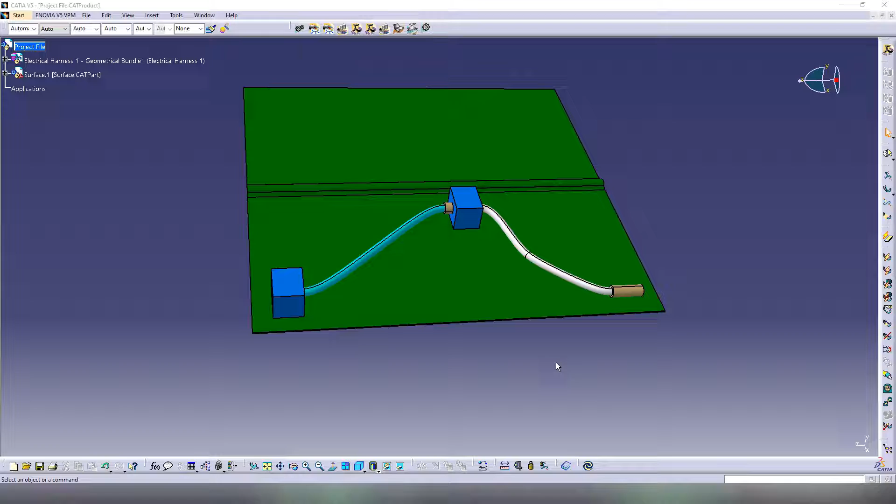Here we have the project that we saved last time in part 2 of the video, so there is nothing to download from any of those videos. We started from part 1 and created all of those solids, so this way it's easier for everyone and also for me. I don't have to provide files to download, and many times links stop working in the future.

So in this way everybody creates its own files, so you will always have them. And in this video we are going to do a few operations just with the wire bundles, so we are going to modify them. I'm going to add a new one around here just to see how the commands for the wire bundles work.

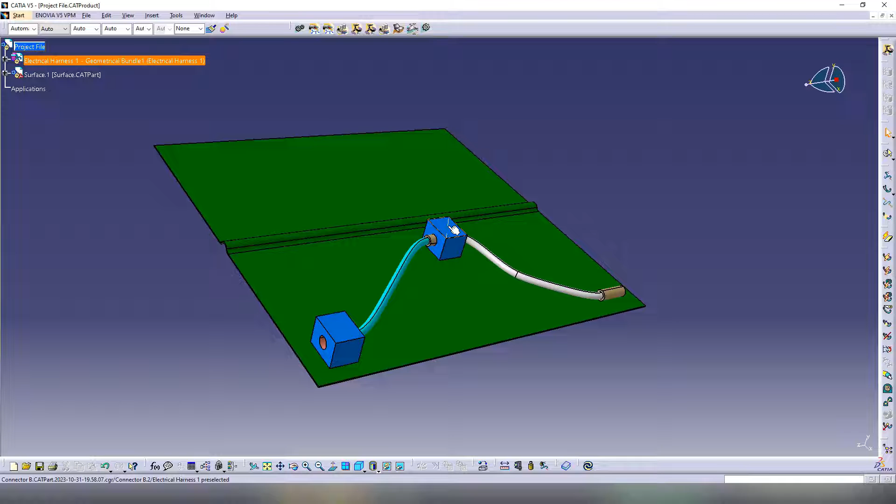And now let's continue with this project here. So in the last video, we did those wires. If you double click multiple times, you're going to get this window. So we are basically activating the file of the wire, which is this one here. So this is a CATPart file. If we click here route definition, here we can see the points that we use to route this cable. So we have from this connector to this connector, those connectors are electrified.

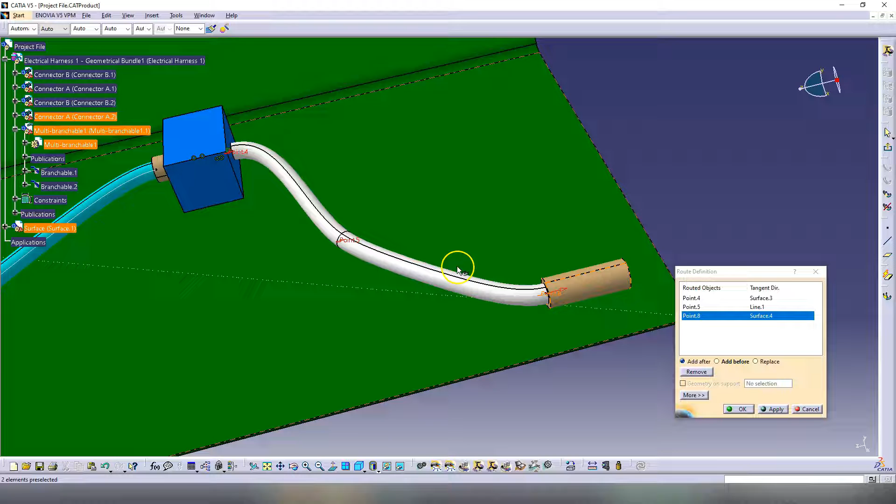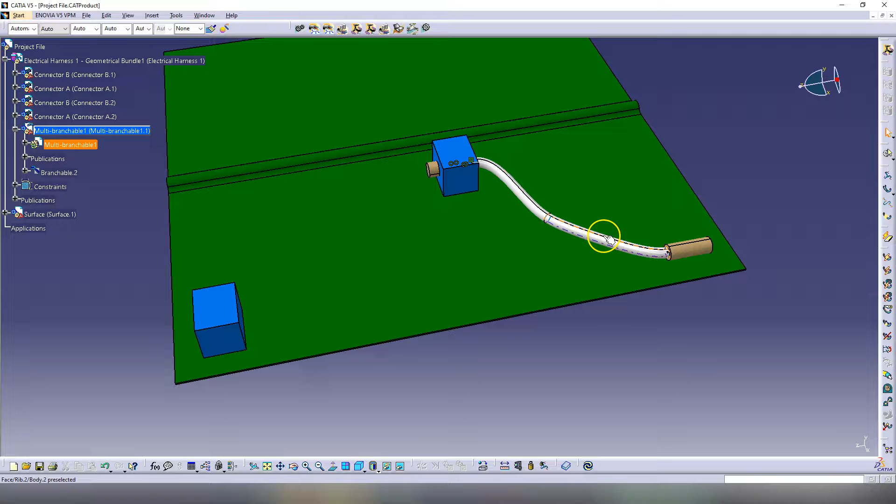And the first thing I would like to show here is how to delete one of those bundles. So if we stay inside this file here, if we activate this file, the multi-branchable file, here on the toolbar we have a command called delete special. So if I click on this and then I click on the branch, we have here delete and delete special. If we press delete special, click OK, then the software is going to delete the branch together with all the links that the branch has.

So you should not go here, right click and delete it from here, because if you do that, it's not going to also delete the publications and links. So you're going to end up with a project file with a lot of errors and a lot of issues.

And also in any company, if you go to a Catia V5 interview, one of the things that the CAD manager is going to want to see if you know how to delete stuff, because he wants to be sure that you're not going to start to fill projects with errors. And again, I teach a lot of those things that you have to do at the interviews in my course. I truly believe it's impossible to not pass a CAD interview with my courses. So I 100% believe it's impossible if you learn everything I teach.

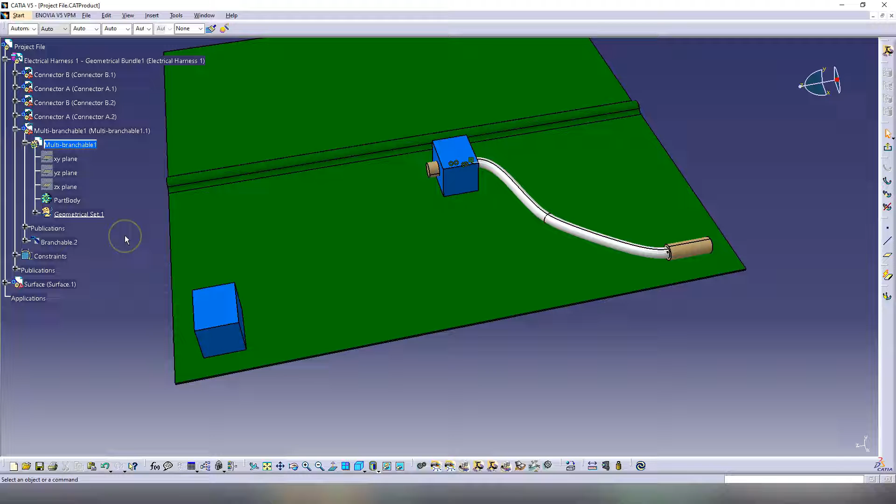So this is specifically for electrical harness design. So now let's make this bundle here again. So I like to activate the multi-branchable CATPart. So from here, this is the command branch definition that we add a new branch, and you want to see that appearing here. Let's keep the same 20 millimeters, bend radius ratio it's 2, route definition.

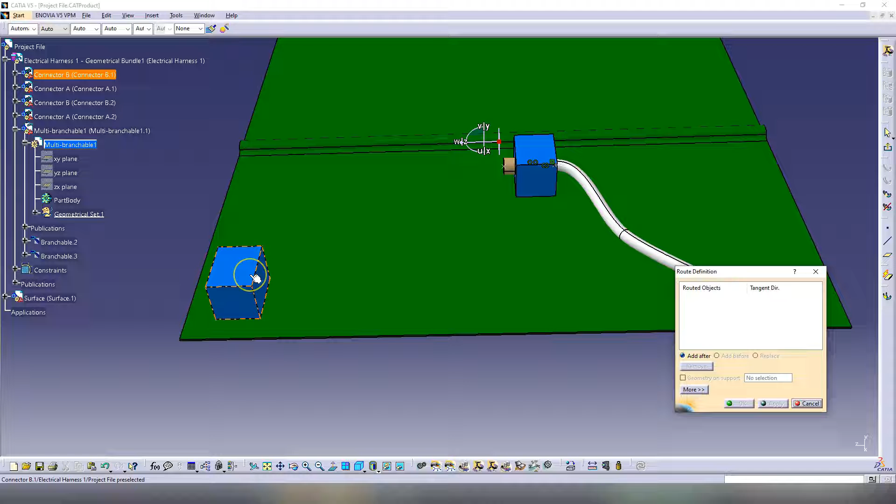So we click on the first electrified connector. We did this in the first video. And then on the second connector here. And in this case, we have a bundle. So now let's say that after we created this bundle, we want to add an intermediate point around here somewhere to make the bundle go from here through this point and then arrive at this connector, or even the other way around.

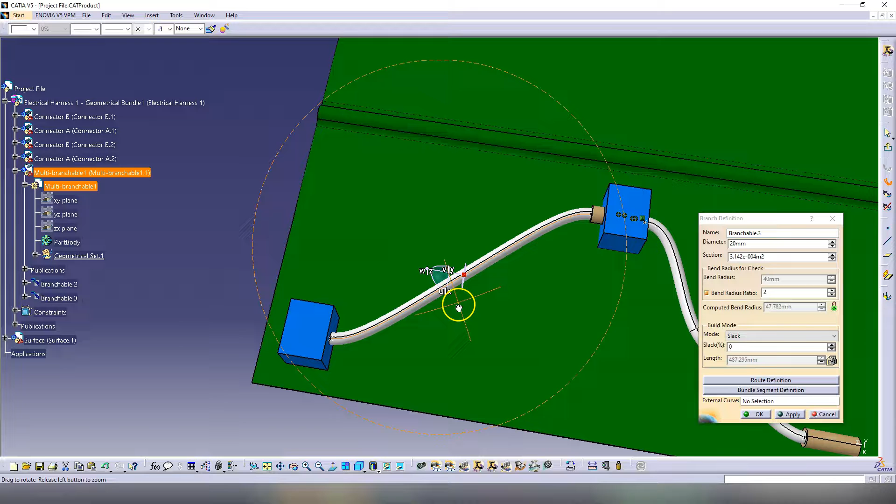So let's add that point here. First, I'm going to open the branch. Here we go to route definition, where we have the points. So I want to look here. This is the first point, so point 9.

If I click on it, it's going to show me the direction, the tangency, and I need to add after, so I'm going to add a point after this one. To add something, you need to already have the retainer or whatever is going to hold this cable in reality, you need to have this one here to click on it.

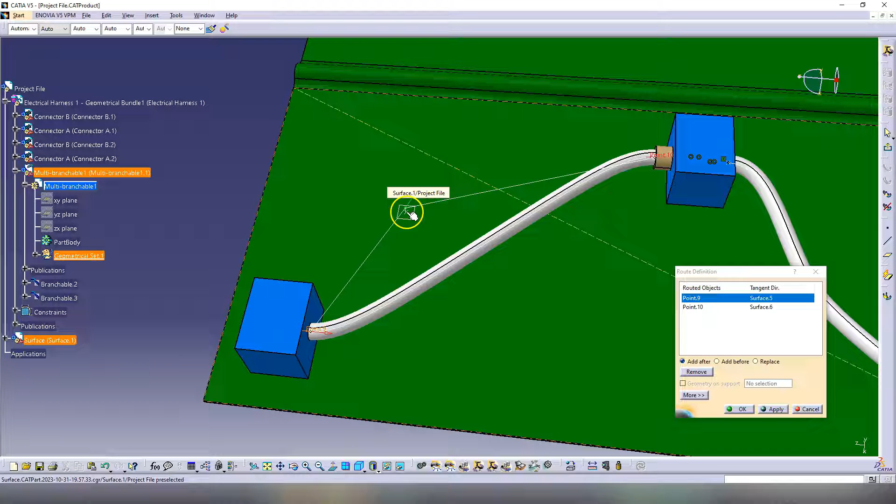But if you don't, let's say you are only making a study. In this case, as I showed in the previous video, we hold down the control key and we can add points on every kind of surface we want. So I'm going to add a point here, and now we have point 12. It's showing the direction. Have it selected here, add after. So I'm going to add another one here.

Now the cable is a little red. This is because the computed bend radius is not respected, it needs to be 40, but it's 39.9 because of the curves the cable is making. If you get that in a project, that can mean the cable is not going to work in reality. But the software is also doing this because of the random tangencies that were added to the points.

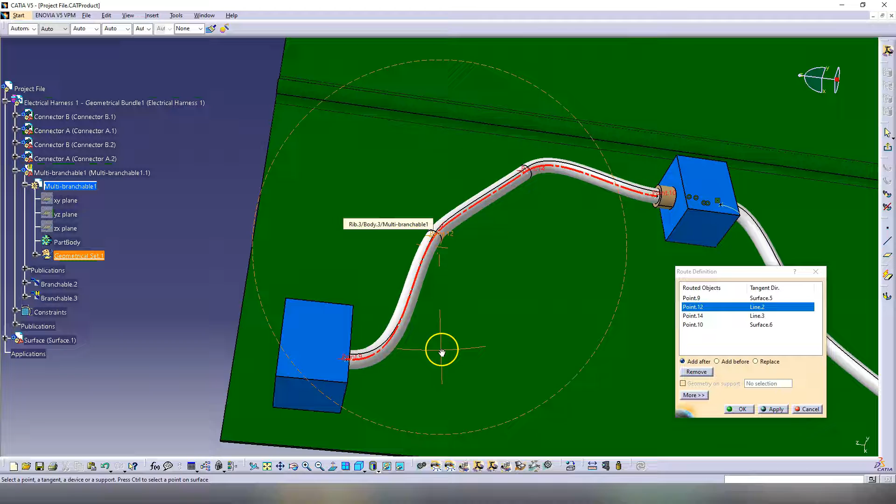So if I go here to the first point that we added, point 12, we can see there is a tangency, this arrow, which is calculated by the software. So I can remove this, if I go here to more, I can remove tangent.

Then I go to point 14, which is here. So I can also remove tangent from this point, and you'll see them disappearing from where it says tangent direction. So now the cable is just going through that point, but it does not have a direction, it does not have a tangency. Now it's 39.99.

So this is kind of a bug that the software does. If you don't have enough slack in the cable, it's going to give you this. This is almost 40, so it should be okay. And to fix this, we need to add slack here.

So there are two types of slack in Catia V5. There is slack that we add here directly on the bundle, which is added to the entire branch from start to finish. We have percentage here, so I can add 1% slack. If I click apply, 1% is going to be added to the entire cable. Now it's not red anymore because that slack will make the branch have smoother curves.

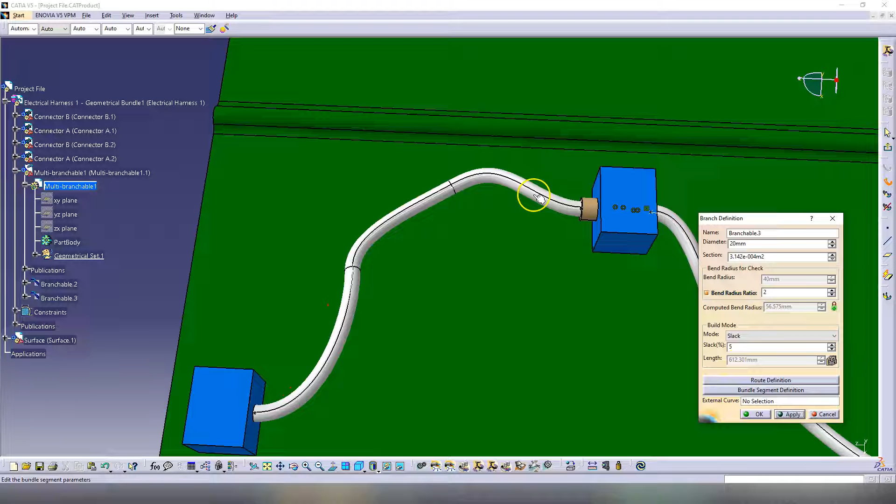So I can add 5%. This means the length of the cable is going to increase. Here we have the length, the current length is 588.9 millimeters. Every percentage of slack that I add, so this is 5%, I'm adding 5% from this value. So if it's 588, 5% is going to be around 29 millimeters, so it's going to increase by around 29 millimeters. And you can also see the cable changing its shape.

Another type of slack here is to add directly the length that you want for the cable. So if you click on this one, you change the length, and it's going to show you after that what that means in a percentage of slack.

Another one is bend. So bend, I explain this more in the course, I give more examples. This needs some more examples. When you have a bundle that you know is going to bend in reality, you select this here because you want to avoid all the errors that Catia can give you.

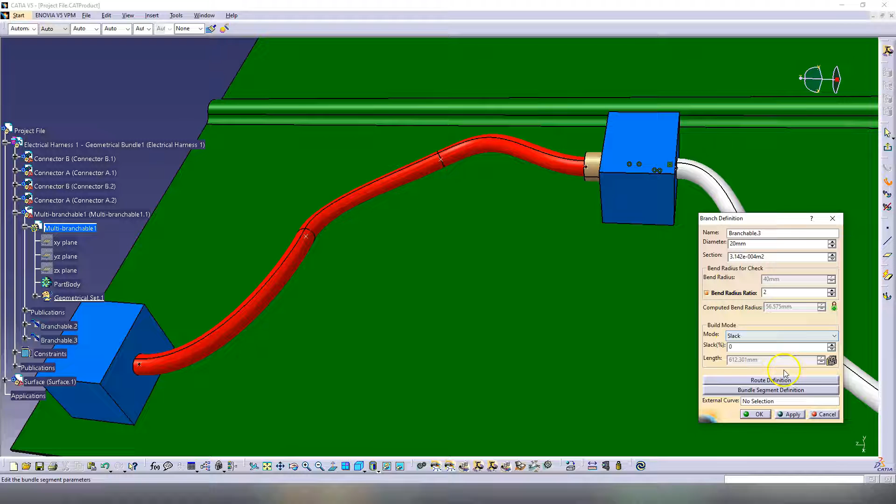So let's keep for now the slack in percentages. Let's add here 5% slack, click OK. Now the cable has a little more slack.

One issue here is when you don't have tangencies, the cable can take any direction, and as you can see here it's clashing with the surface. So to avoid this you need to add directions inside the cable, tangencies.

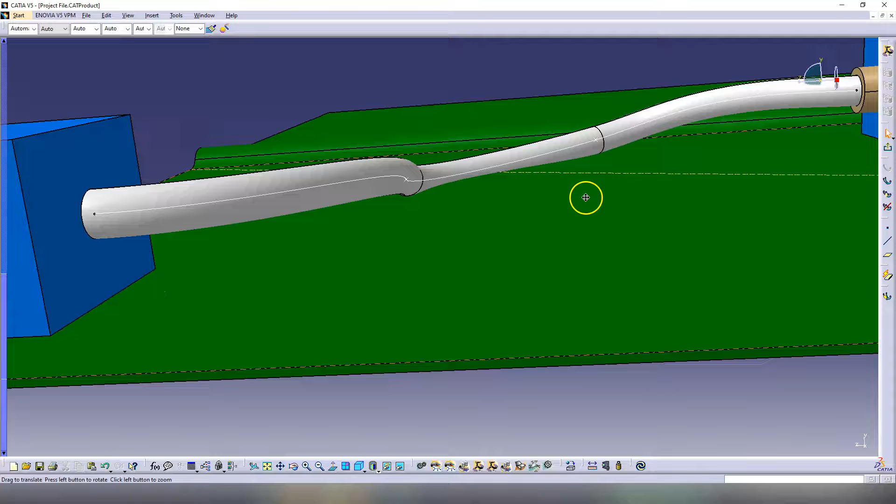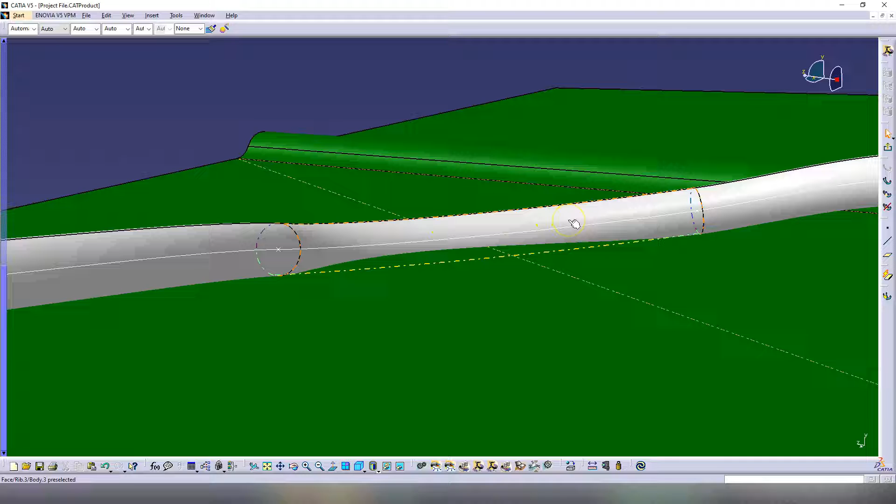In automotive you need to be careful with that because you don't want the cable clashing with the body in white, because after that whoever projects the carpet or whatever is going on top of the cable, it's not going to take the clash into consideration, so he can just build something over it exactly as you see it here, and then in reality your cable is not going to fit because he used the cable exactly as it is to design whatever he's designing. Normally in a professional environment he's probably going to contact you and tell you this does not look right, but you are the one that is responsible, not anybody else.

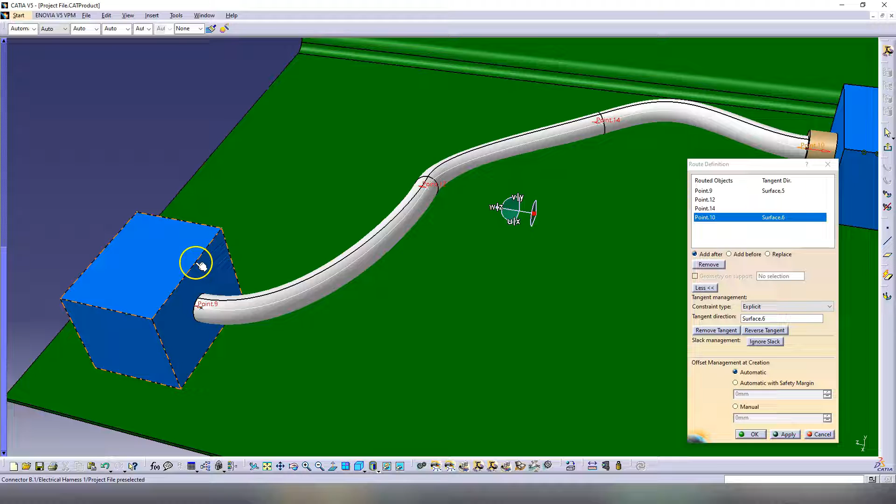So let's try to fix this. I'm going to add some tangencies that we have around here. For this point I'm going to add the x-axis as a tangency, so I can use every line that I have here to add the tangency. For example, I can use this line on this connector, but I cannot click on it because it's electrified, so it's seeing it as an electrified connector. But I can use this line here from the surface. Now you see this point 12.

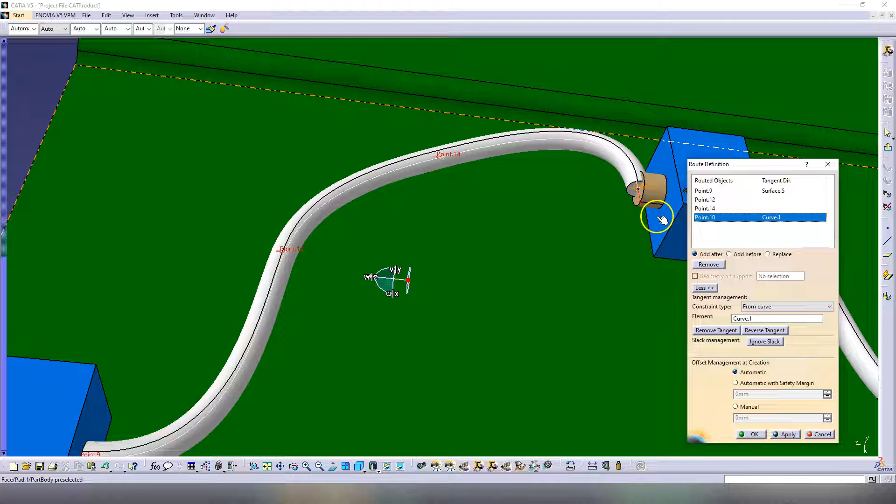You can see the error that I did here. When you add the tangency, you want to make sure that the point is selected when you click, otherwise it's going to add the tangency to whatever you have selected. By mistake I had point number 10 selected, and when I clicked it changed its tangency. I'm using this as a lesson because you will make a lot of those mistakes, and they cost you time - you have to fix everything back. So in order to fix this, I click on point 10, I do replace, and I click on the connector again. Now it's getting fixed here.

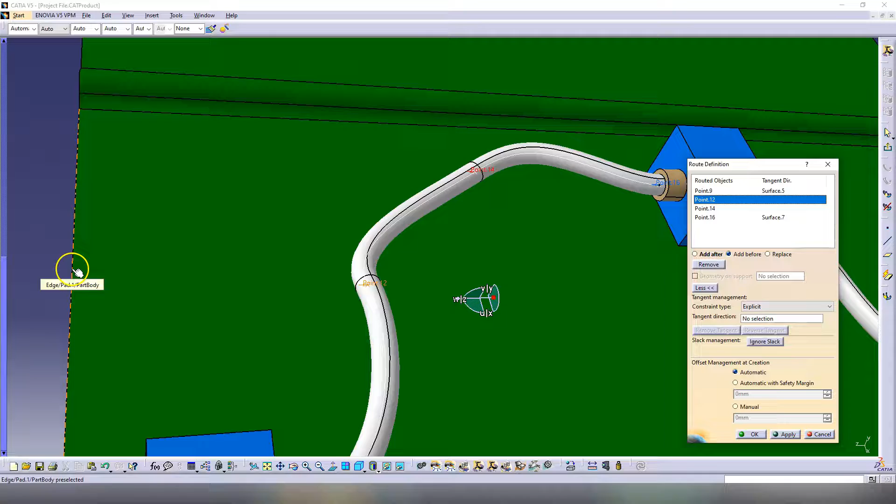Then let's go to point 12. I'm going to click on the line again, and you can see that we have the tangency, but it's added in the opposite direction - that's why it's messed up here. So I'm just going to click. I can see the arrow here, but it's red like the cable, so sometimes you won't be able to see it. Those are the colors that Catia uses, but you also have the option here - reverse tangent. I'm going to click on this, and now you see it's correct.

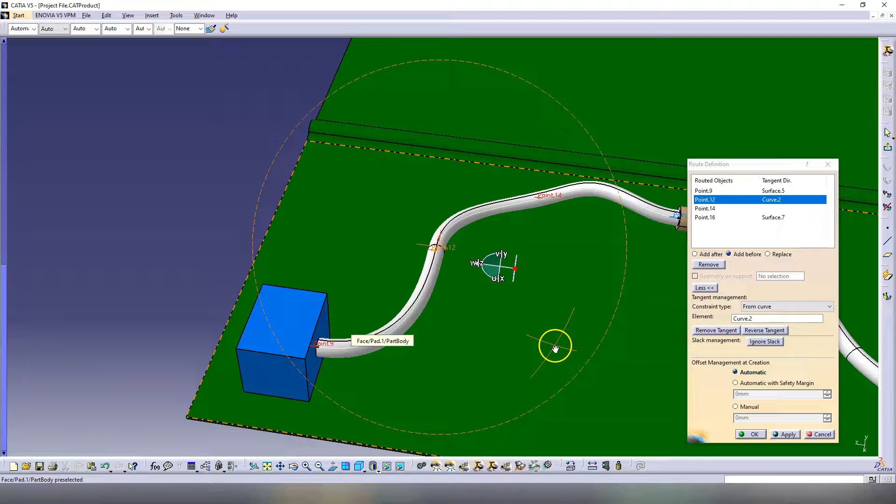For point 14, I'm going to use this other direction - this line here, or an axis. Again it's reversed, so I click on the point, reverse tangent. Now let's click OK. And we can see the computed bend radius is 35.

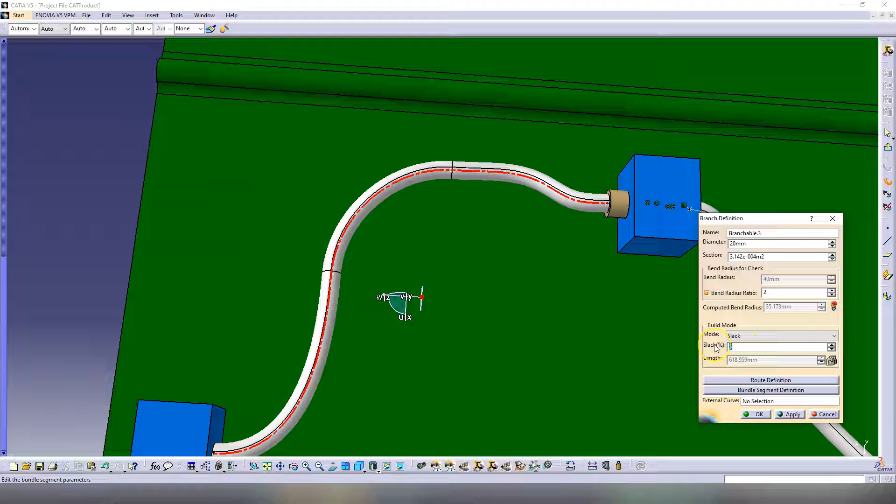And that is happening because we have too much slack. So let's reset the slack, let's go back to 0 with the slack. Click apply - this is how the cable looks naturally without any slack. You can add 1%, 2%, up to the maximum, and you see it starts to look better and better, smoother and smoother. But this is one type of slack, so let's take this back to 0. Click OK. This is adding the slack everywhere on the bundle.

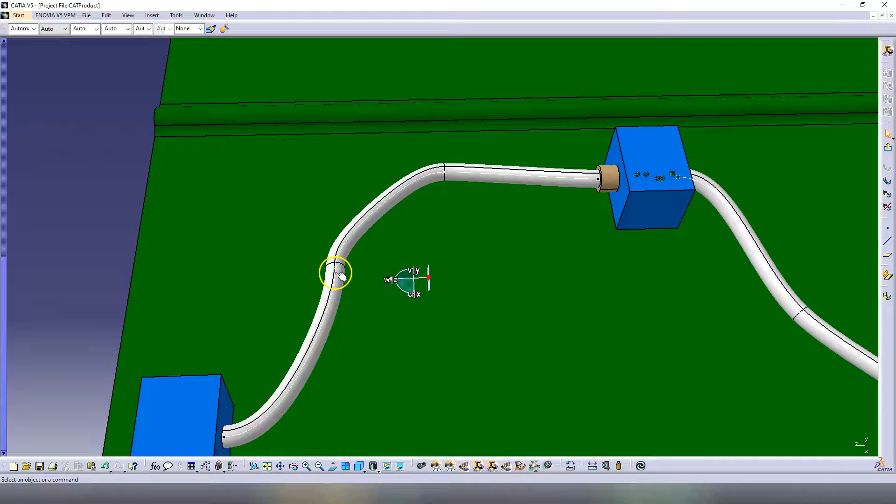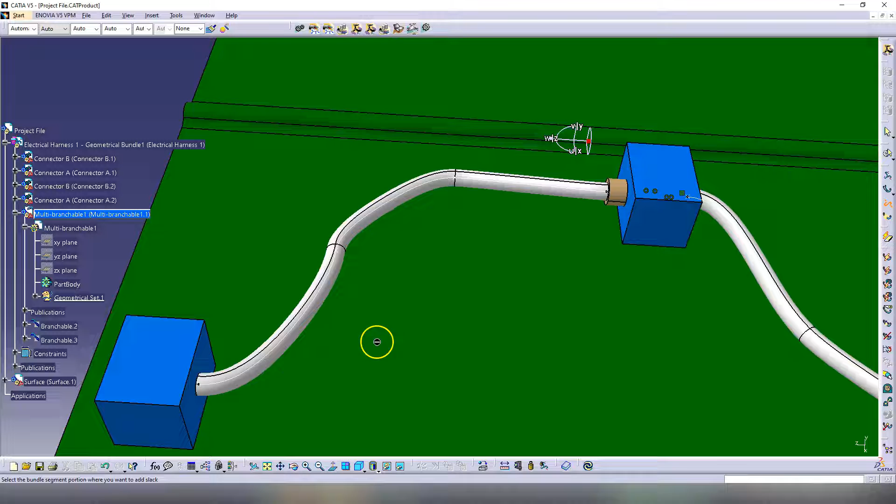But what if I want to add slack in between the points? I want to add a value of slack here, one here, and one here, because this cable has 3 segments. For that we use local slack, which is in the electrical harness assembly workbench. You can switch the workbench, or if you activate a product, the software should automatically switch to that workbench. Here is the command, add local slack. If I click on this, I need to click on the segment where slack is going to be added - let's say from here to here.

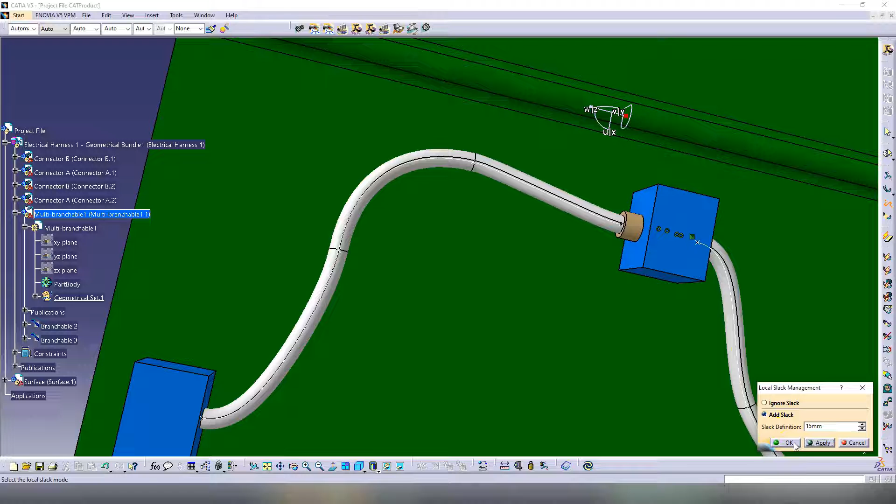Here we have add slack - this is in millimeters, not percentages. Let's add 5 extra millimeters of length in this cable. Slack is basically extra length. Click OK - you see it's getting better. Maybe I can add 15. Now you see it has about a 90 degree bend - this is probably what you want. Then I click again and click on this segment.

Let's add some slack here. So we need less slack here, you want to look around. Let's add 3 millimeters - so 3 millimeters here looks okay.

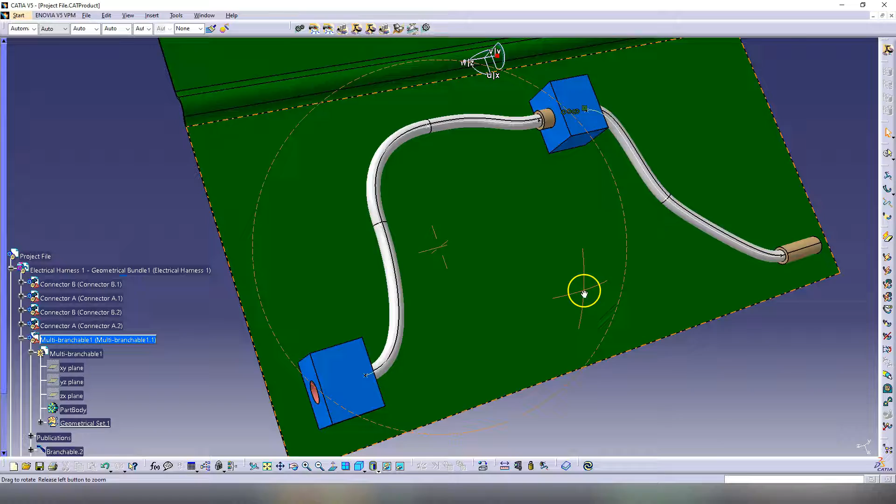Add local slack on this one. Let's add 5 millimeters here - you see, 5 millimeters looks right. So now you see the bundle, it's not clashing. This is how you adjust the cable.

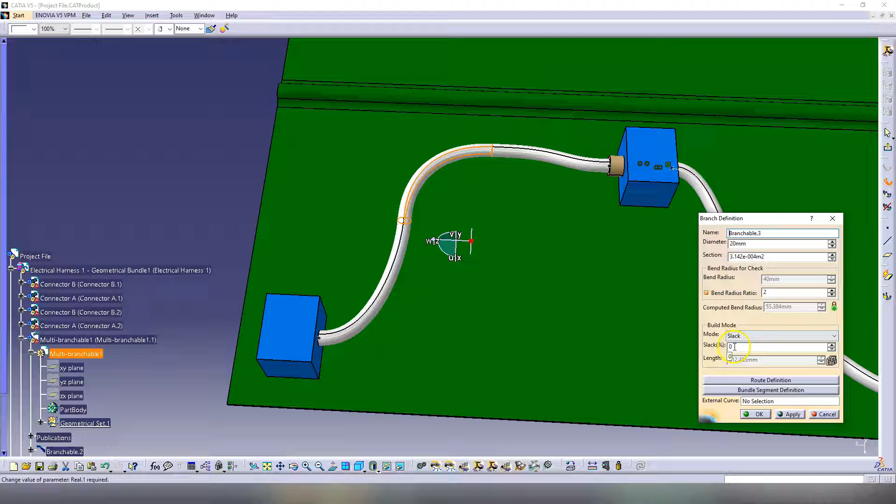You cannot see anywhere in the tree the slack that was added, but you can verify that by clicking on add local slack and clicking on a bundle, and it will show you if you have any local slack on it. So you want to be careful with that. It will also show on the total length here, but it's not going to show here, so be careful not to add slack here and local slack at the same time.

Click OK. So if you want to add a point on a bundle, but you don't want that to be on a surface like we had here, but just in thin space - let's say you're doing a study for something, because this is how every project starts. Maybe you don't have all the parts, you don't have all the retainers, but you need to design a cable to occupy the space that you need.

So in a company, this is how you are going to design it. You're going to have the mechanical project, like a part of an automotive vehicle, and your boss is going to tell you: look, we need to add a cable in there so that everybody sees there is a cable in there. You won't have fixings, retainers, or even connectors - they won't be there, but you'll need to add the cable.

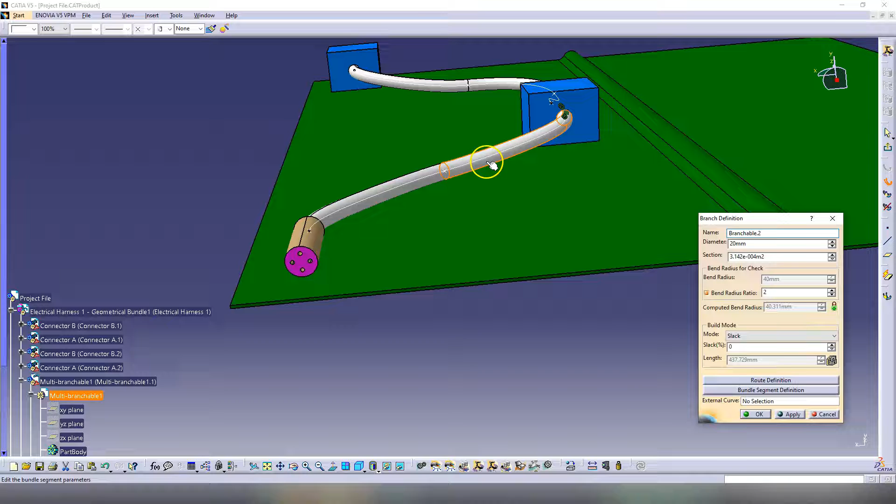So in order to do that inside this bundle - this is a part file inside the multi-branchable - we can add any type of elements from part design. In this workbench, the electrical 3D design part, let's see those here. Those are the newer workbenches. This one, electrical assembly design and electrical part design, those are the older workbenches, and those two are the old workbenches with some extra stuff inside.

If I switch to electrical part design, yes, you have here all the commands, but if I go to electrical 3D design part, let me move this toolbar here again - you're going to move the toolbar for each workbench. So here you have the same commands, but you also have this toolbar with a point, a line, and a plane. This is what they added new in the same workbench.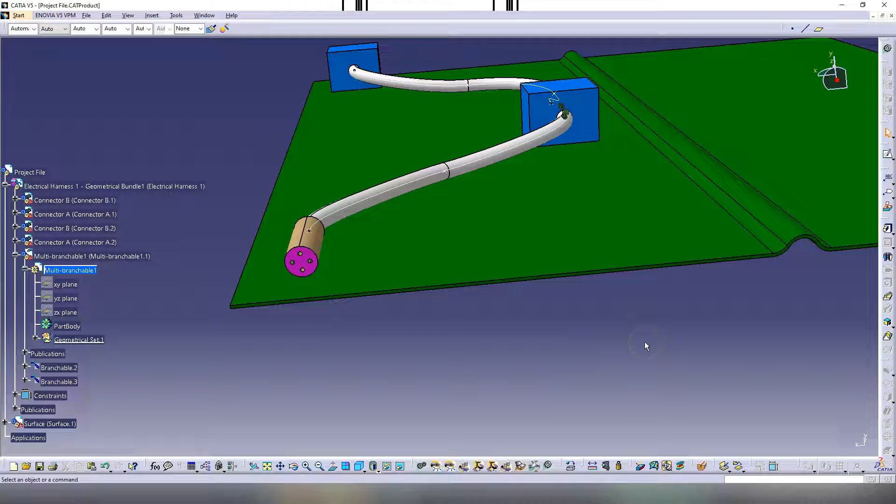If you don't find it in your CATIA V5 installation, you just need to go to part design - let's go to part design, and you need to have this part file selected. This is basic CATIA V5 knowledge. From here I need the point, the line, and the plane, and I'm going to add a point here, like a small sketch in thin air here.

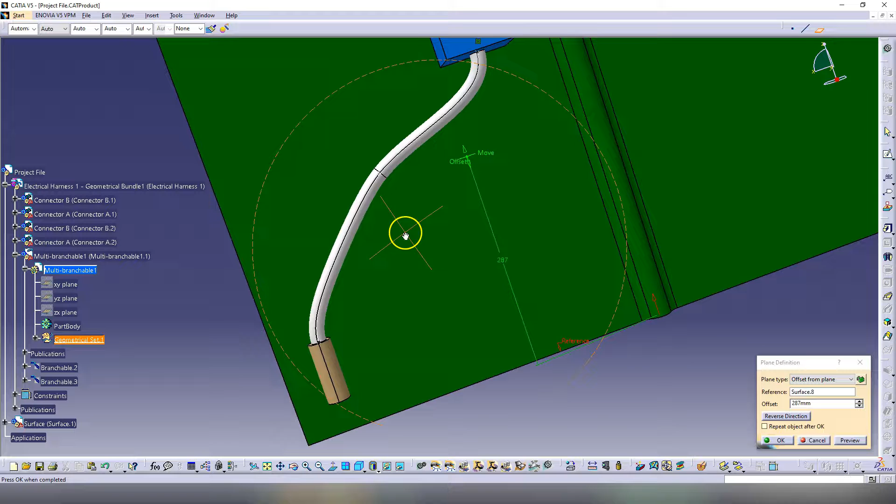For that I'm going to need the plane, and I want to add the plane on a mechanical part like a sheet metal or something like that. So I'm going to add it here, let's move it here, and the offset around here is going to be - move it a little back. Let's say right in the middle of the cable. Click OK, and let's add the sketch on this.

So here we are in sketch mode, and I'm going to add the point around here somewhere. So if I go here in sketch mode, I want to add a circle, and let's make this 20 millimeters, exactly as the cable is. You only need the point, but I like to add circles for reference.

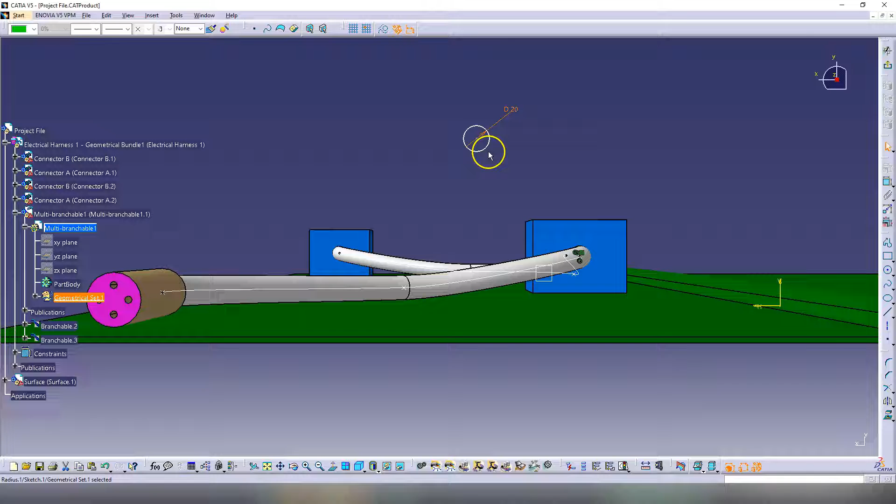So this is the cable, and I like to add the circle because I can just add the dimension between the circle and this surface here. Now I can control it with a dimension - if it's 0, the cable is going to touch the surface, but if it's 10, the cable is going to be 10 millimeters away from the surface. So let's do 20.

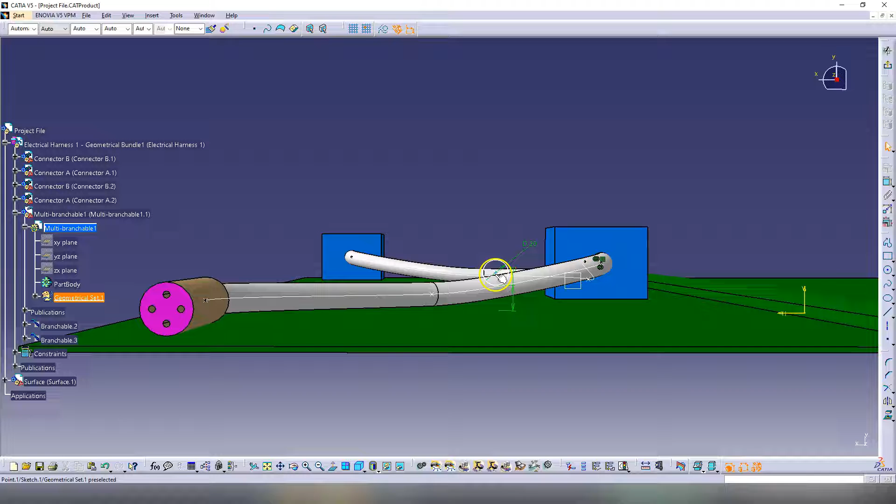And I want the point in the middle of the circle to transform it into a standard element, so I can see it outside of the sketch. I can also control this position, but I'm going to leave it like this for now. Exit the sketch. Here we have the sketch.

Open the cable route definition, and we have this point here that we don't need anymore. So I'm going to replace this one. Click replace with this point here that we just created. And you see the cable is just going through the point, but I need to add a tangency.

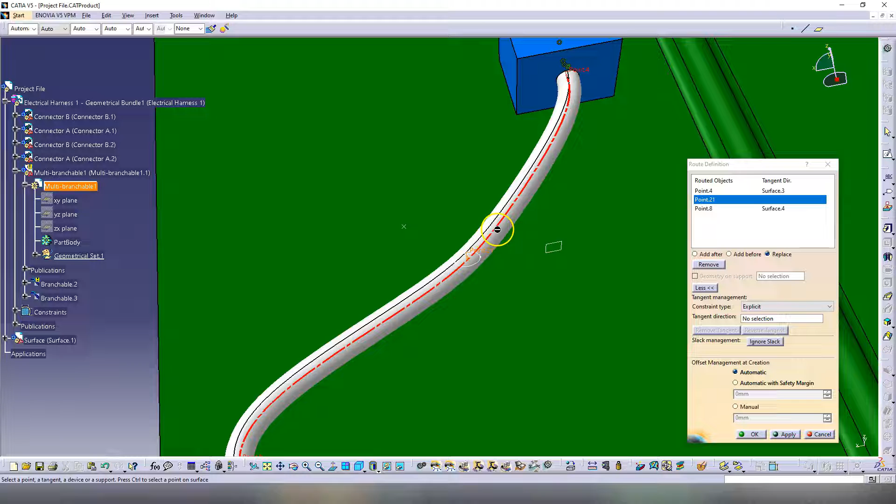So I'm going to use this plane as a tangency. It's going to be the other way around, so I'm going to do reverse tangent. Now we added a point like this.

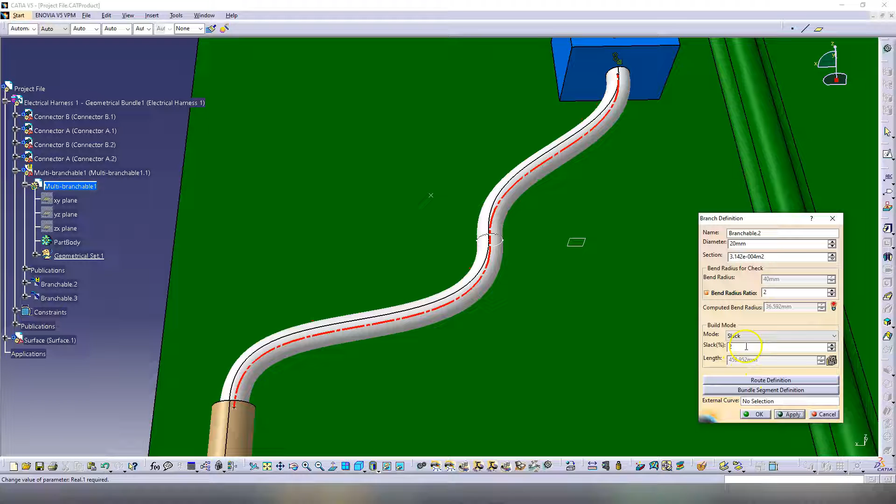Computed bend radius is 39.9, so it might be the same thing. We just need to add just a pinch of slack, just 1%. Let's see if we can fix it like this. No, so it's becoming worse.

So let's go inside the sketch and just move this to the left. Exit sketch. Let's move the plane. So you see I'm controlling all the points. So even if I'm moving the plane, you see how the cable is changing in real time.

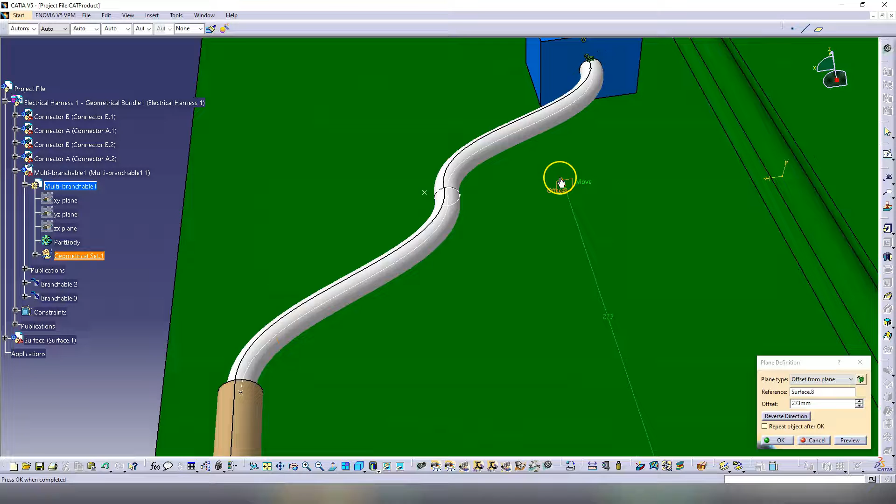So I just solved the bending radius issue. Here it's red. If I move it a little forward, now the cable is green. So by green I mean here. So now the bend radius is 43.

So we are in parameters. When you work in companies, you're going to get parameters for the cable. A lot of people ask me, how do you calculate the bending radius? Because they hear that in an interview or something. That's not the question you should ask.

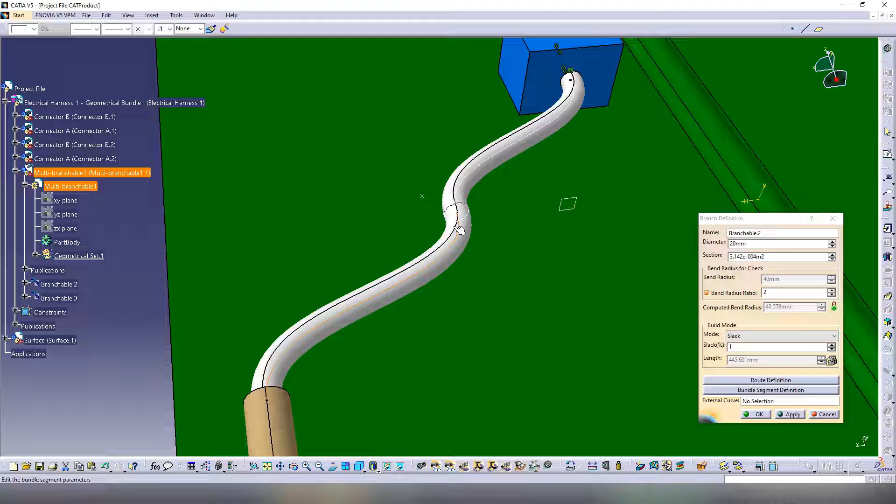You need to understand what that is first and where it's coming from, because it's coming from the cable supplier, from the cable manufacturer. They are going to tell you what's the bending radius. I teach that in the courses because that's a long story, so I teach all the aspects of the bending radius. I also have a video on my channel where I show how to calculate and do the bending radius in a short video. Click OK.

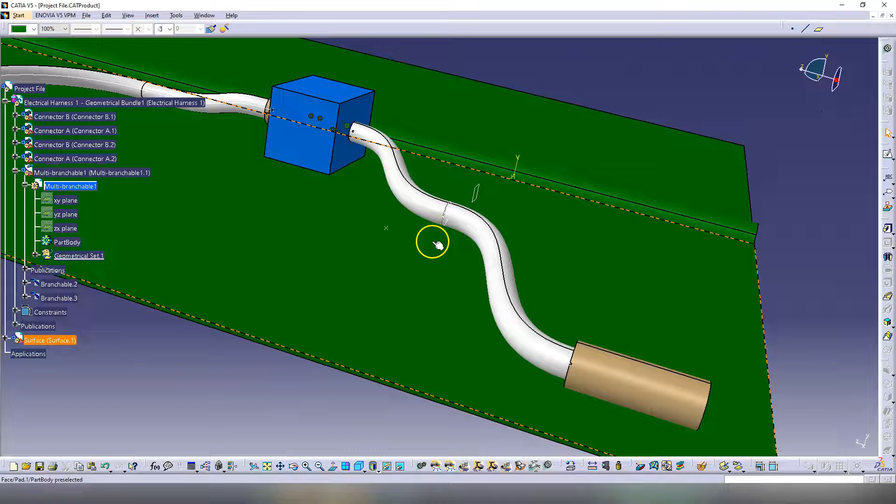So here we have a modified bundle with a point that's added in thin air. You can do something like this, and after that a mechanical design engineer is going to be able to design some kind of support or retainer in here. Maybe it's going to add a punch in this sheet metal, and you're going to have some kind of retainer sitting on that punch.

So this is how you edit and modify cables. This is not everything that CATIA has. We also have the bundle segment definition, where you can see all the segments that the cable has, because it's not defined by the points, the segments.

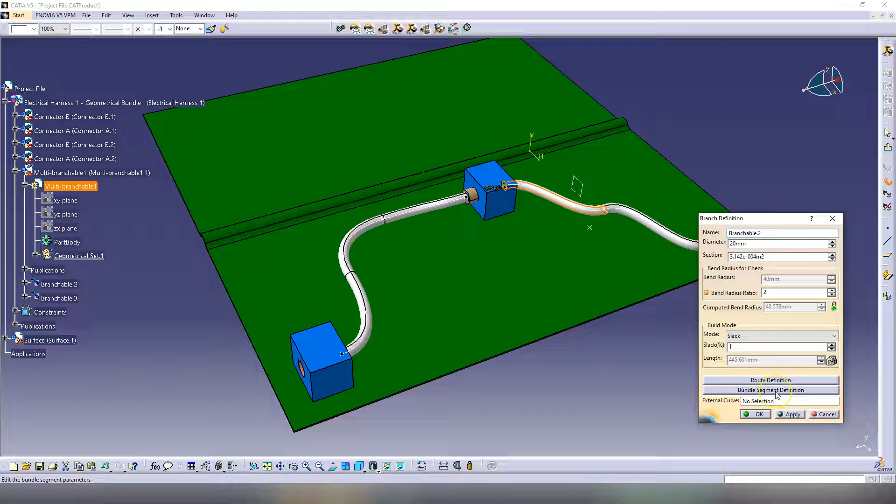You can add, so we can add a branch point. Maybe you'll have a thicker cable and then two cables that split into smaller cables, so you need to add branching points in there. We have remove branch point, and that's being managed from here, from bundle segment definition. But I'm going to cover this in a different video because this one is getting too long.

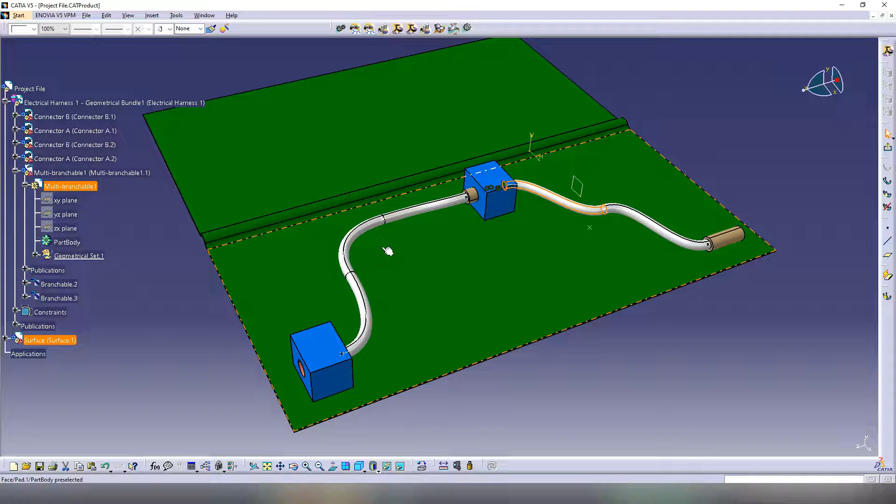In the next video, we are going to design a retainer very quickly. We are going to electrify that retainer and add it to a project to see how you add retainers inside the project. As you can see in those videos, I'm combining software knowledge with real job knowledge. I'm teaching you the exact thing that you would do when you work on a job, so I'm not just showing the software here because that's not enough for a job.